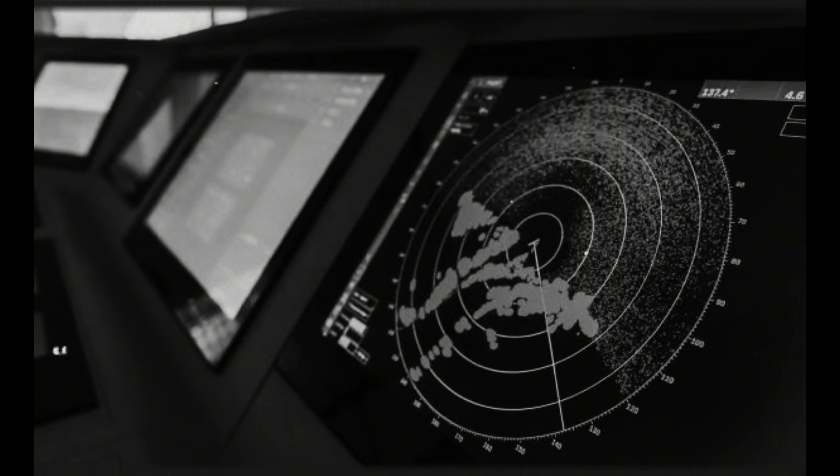The sonar trace appearing on NATO screens in the early 1970s does not look like a ship. It looks like a glitch in the laws of physics. In the cold, pressure-crushed silence of the North Atlantic, a new shadow is moving faster than anything nature or engineering should allow. It is the beginning of a technological sprint that will break records, break budgets, and eventually break the men inside the machine.

For the sonar operators of the Royal Navy and the United States Navy, the North Atlantic in 1970 is a known quantity. It is a vast gray battlefield mapped out in frequencies and decibels. They know the rhythmic thrum of a Soviet November-class submarine and the quiet, metallic whine of a Victor-class. They understand the capabilities of their adversaries because the physics of water imposes hard limits on what a submarine can do. Resistance increases exponentially with speed. To go twice as fast requires 8 times the power. Consequently, submarines are predators of patience, moving slowly to remain silent, hiding in the thermal layers of the ocean to wait for a target.

But then the reports begin to arrive, and they describe something that should not exist. A British frigate patrolling the Greenland, Iceland-United Kingdom gap detects a contact moving deep below the isothermal layer where water temperature stabilizes. This is normal. What happens next is not.

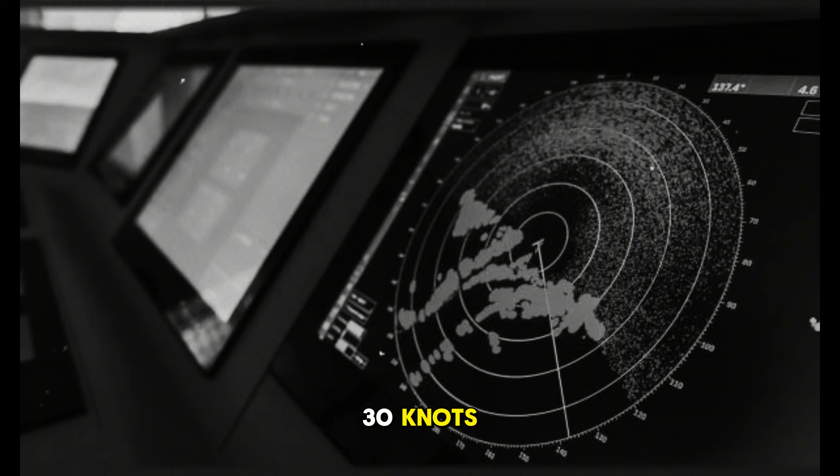The contact accelerates. It does not speed up gradually like a heavy vessel overcoming inertia. It bolts. The sonar operators watch their displays in disbelief as the target speed climbs past 30 knots, then 35, and finally breaches 40 knots. To put this in perspective, 40 knots is roughly 46 miles per hour.

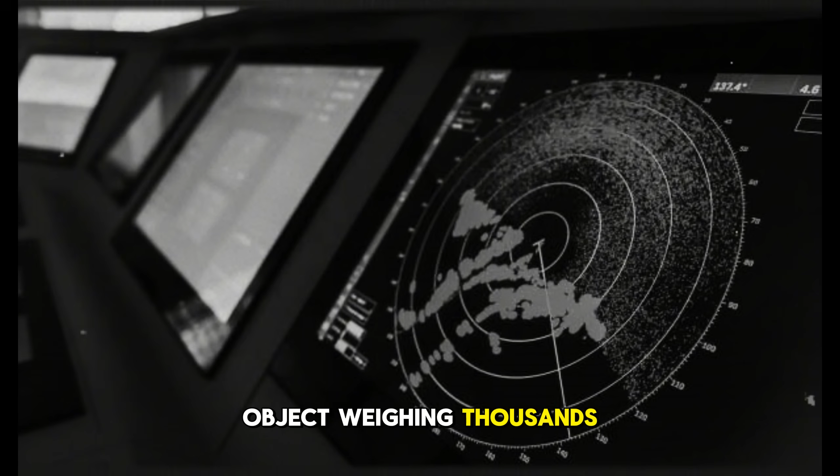In the dense medium of water, for a submerged object weighing thousands of tons, this speed is akin to breaking the sound barrier. Most NATO torpedoes of the era are designed to chase targets moving at 25 or 30 knots. This new contact is moving fast enough to outrun the weapons designed to kill it.

The initial reaction in Western intelligence circles is denial. Analysts at the Office of Naval Intelligence assume the data is flawed, perhaps a sonobuoy malfunctioned, or the operator mistook a biological anomaly, a fast-moving whale or a school of tuna, for a mechanical one. The ocean is full of strange noises, and it is easier to believe in a machine error than to believe the Soviet Union has solved a problem that Western engineers consider impossible.

But the contacts continue. They appear in the Mediterranean, in the Barents Sea, and in the deep Atlantic. The pattern is always the same. The target appears out of nowhere, executes maneuvers with a turning radius that defies hydrodynamic drag, and then accelerates to speeds that make tracking fire control solutions collapse. It behaves less like a submarine and more like a fighter jet.

By 1972, the denial has evaporated, replaced by a cold, professional dread. The West assigns a code name to this new class of vessel. They call it the Alpha.

The emergence of the Alpha-class submarine forces NATO to confront a terrifying reality. Their entire anti-submarine warfare doctrine might be obsolete. Western naval strategy relies on the concept of first look, first shot. The idea is to detect the enemy quietly, fire a homing torpedo from a distance, and sink the target before it realizes it is being hunted. But this doctrine assumes the target cannot simply outrun the bullet.

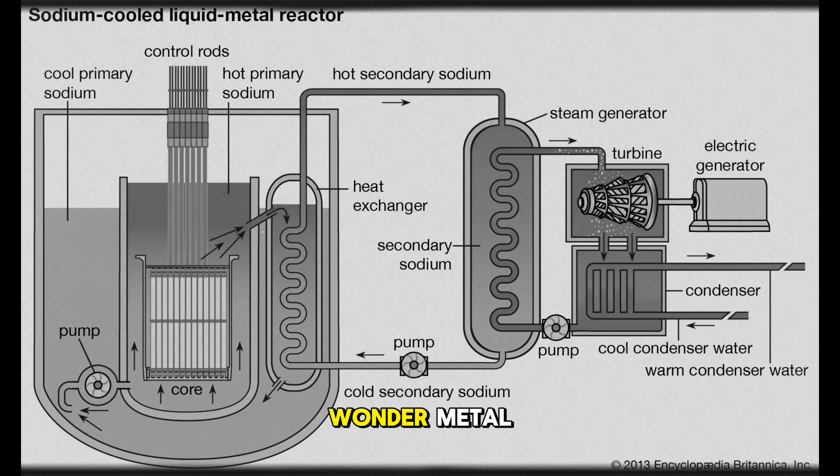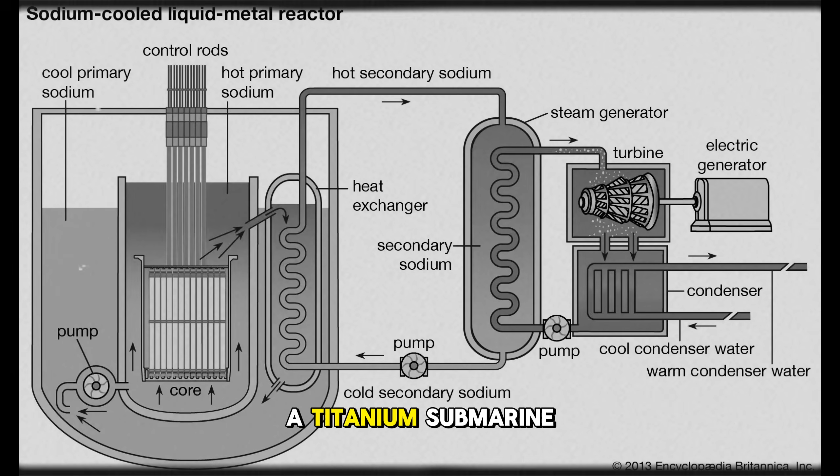Titanium is a wonder metal. It is 40% lighter than steel, but equally strong. It is paramagnetic, meaning it does not have a magnetic signature, rendering the magnetic anomaly detectors used by NATO patrol aircraft useless. A titanium submarine would be a ghost to magnetic sensors and a rocket to acoustic sensors, but choosing titanium was only half the solution.

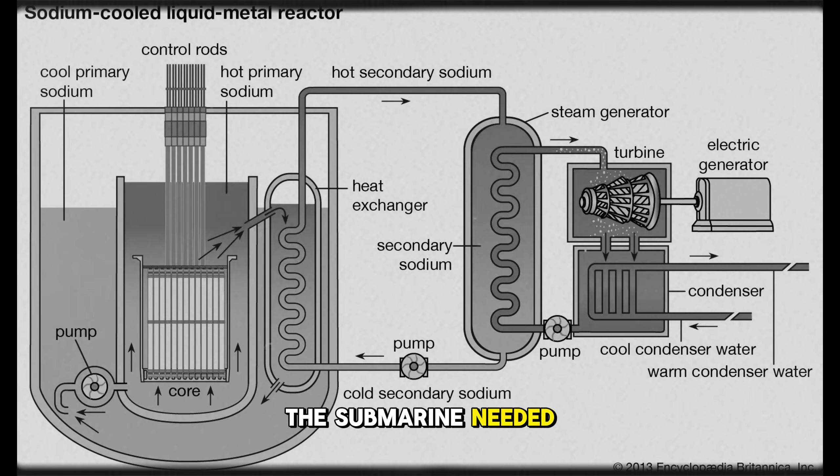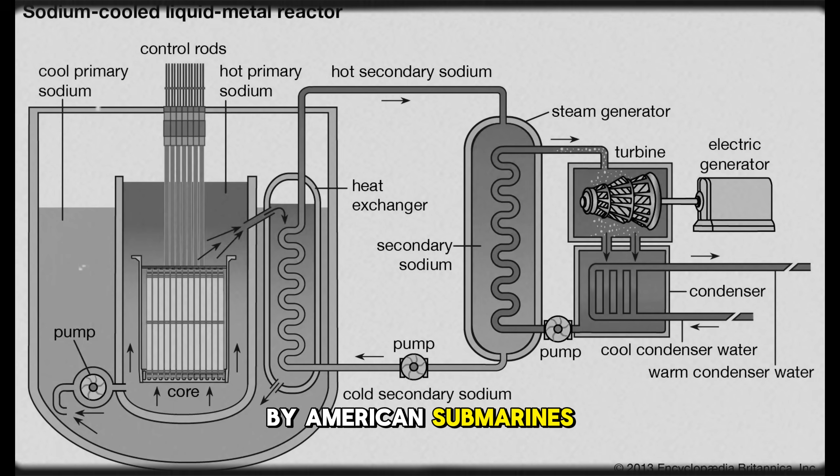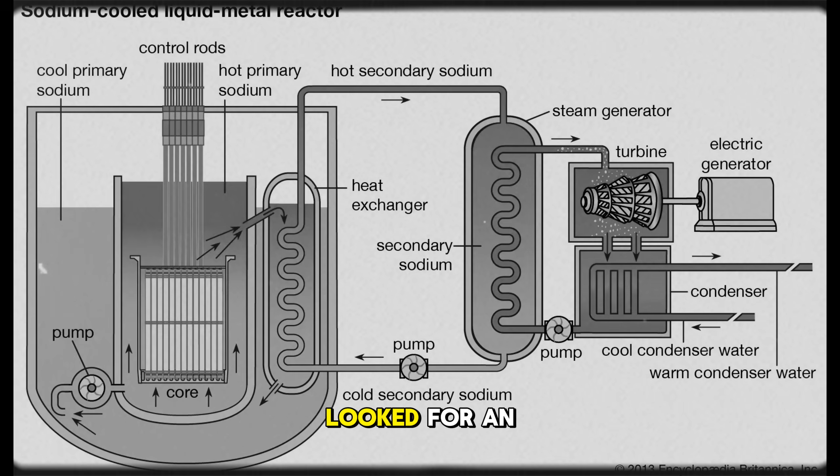To reach 40 knots, the submarine needed a propulsion system with a power-to-weight ratio that was unheard of in marine engineering. Standard pressurized water reactors, the type used by American submarines and civilian power plants, were too heavy and too bulky. They operated at relatively high pressures and required massive shielding and piping systems. The Soviet scientists looked for an alternative and found it in the periodic table's heavier elements.

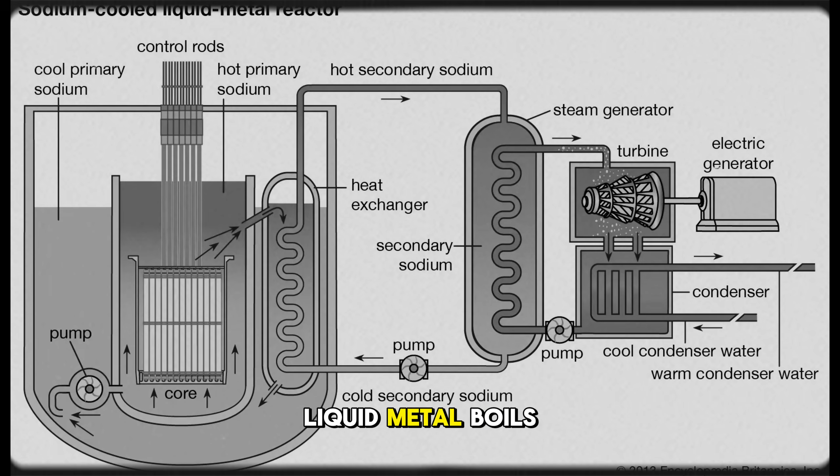They proposed a reactor cooled not by water, but by liquid metal, specifically a mixture of lead and bismuth. A liquid metal reactor is a terrifyingly efficient heat engine. Because liquid metal boils at a much higher temperature than water, the primary cooling loop does not need to be kept under extreme pressure to prevent flashing into steam. This allows the piping to be thinner and lighter.

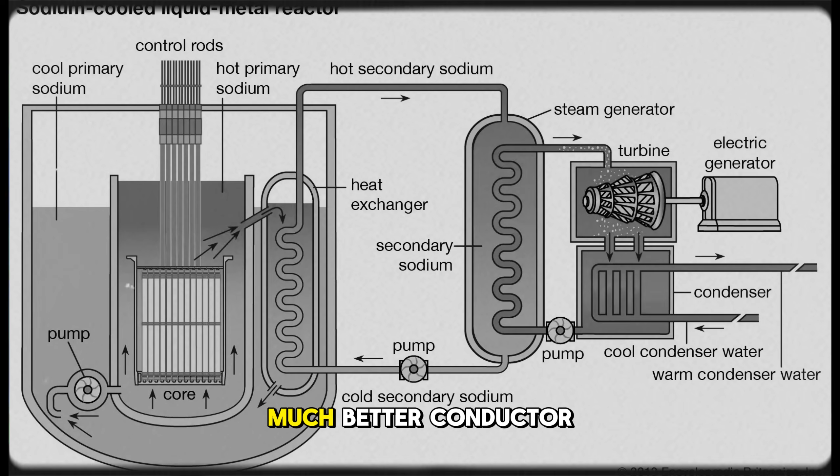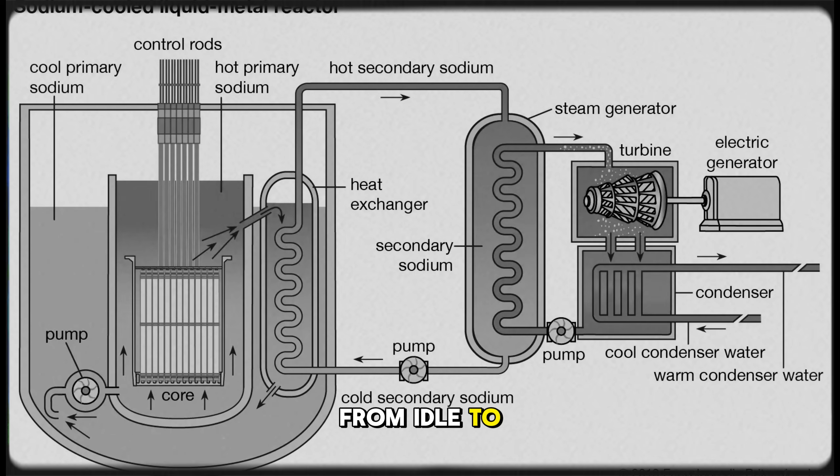Furthermore, lead bismuth is a much better conductor of heat than water. It can pull energy out of the uranium core at a rate that allows for immediate, explosive power changes. The result was a reactor that was compact, lightweight, and incredibly powerful. It could go from idle to full power in minutes, giving the Alpha the acceleration of a sports car.

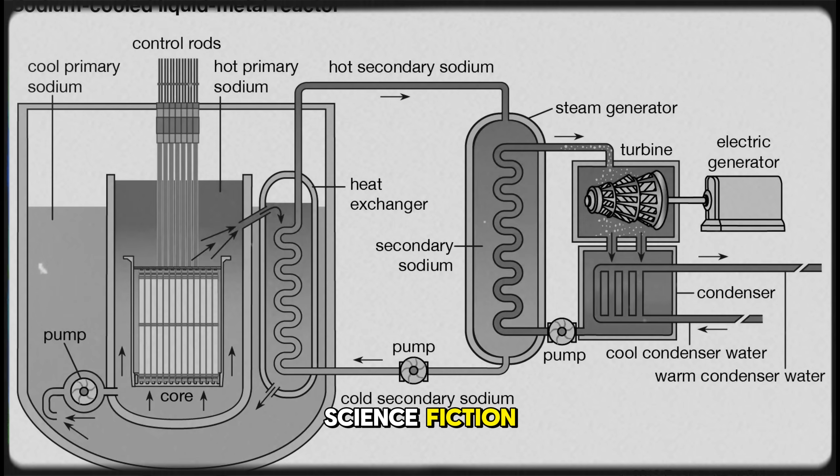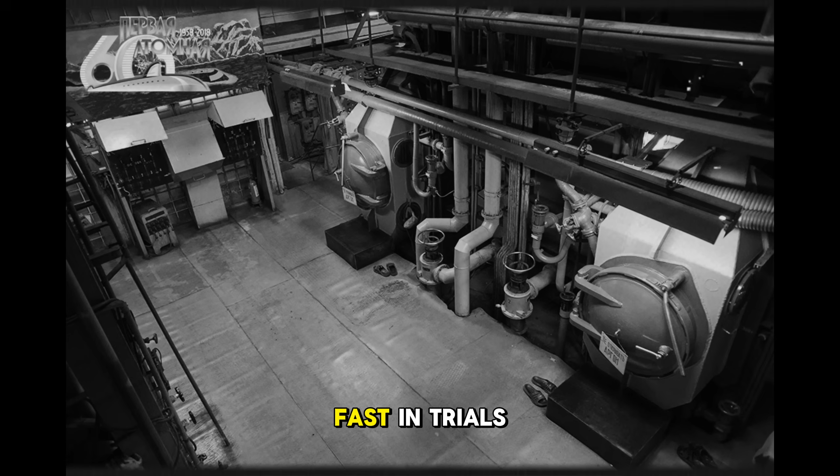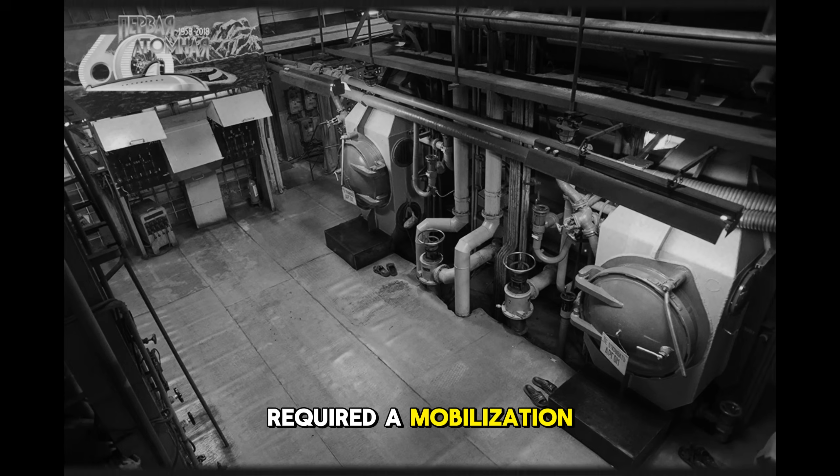When combined with the titanium hull, the specifications of the Project 705 submarine seemed to belong to science fiction. It had a displacement of only 3,000 tons, half that of a standard attack submarine. It carried a crew of roughly 30 men, relying on heavy automation to replace the dozens of sailors usually required to turn valves and watch gauges. And it was fast. In trials, it would eventually hit speeds that remain classified but are rumored to approach 45 knots.

However, the decision to pursue this design required a mobilization of Soviet industry that rivaled the space program. The Soviet Union had to build an entire infrastructure from scratch just to construct the hull. Welding titanium is not like welding steel. Titanium is highly reactive. If hot titanium comes into contact with oxygen, it absorbs the gas and becomes brittle. A weld made in the open air might look perfect, but it will shatter like glass under the pressure of the deep ocean. To solve this, the shipyards at Severodvinsk had to construct massive, hermetically sealed halls.

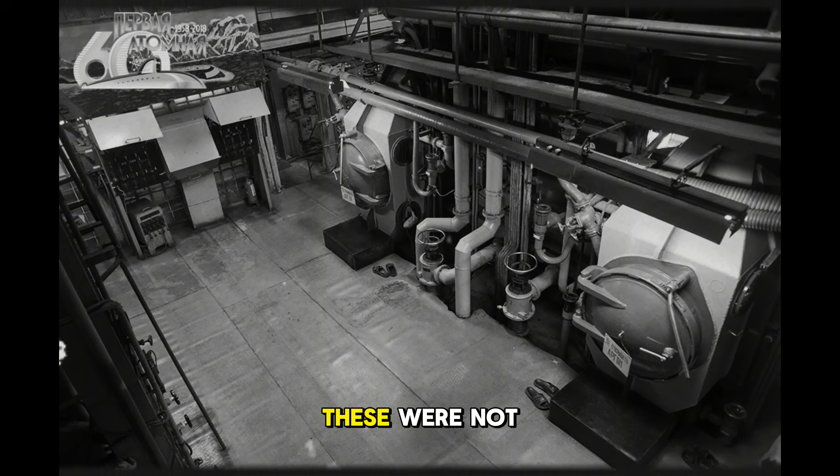These were not just clean rooms, they were atmospheric chambers filled with argon gas. Workers had to wear suits reminiscent of cosmonauts, breathing supplied air while they welded the hull sections in an oxygen-free environment. The cost was astronomical.

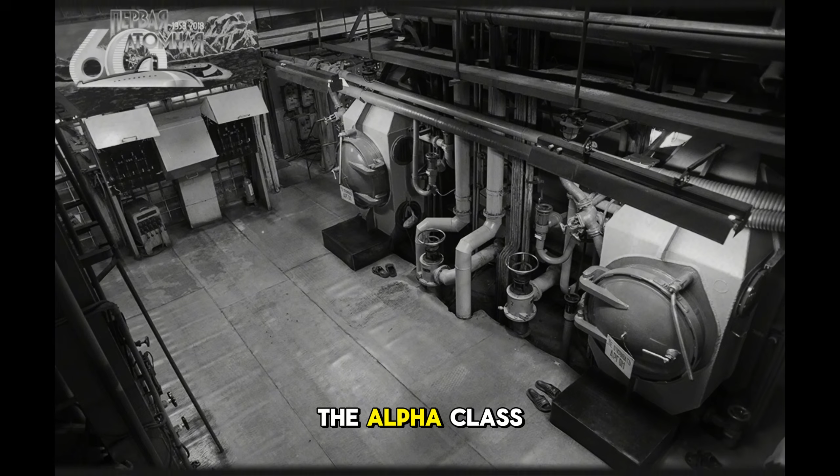The titanium alloy was expensive to mine, expensive to refine, and expensive to work. The rejection rate for parts was high. A single microscopic flaw in a weld meant that entire sections of the hull had to be scrapped. The Alpha-class submarine became the most expensive naval project in Soviet history.

Yet the Soviet leadership wrote the checks. They were driven by the fear of American carriers and the seduction of technological superiority. They believed that the Alpha was the silver bullet that would neutralize the U.S. Navy's numerical advantage. They envisioned wolf packs of these titanium interceptors sprinting out from the Kola Peninsula, immune to torpedoes, diving deep to evade sensors, and surfacing to destroy the enemy fleet.

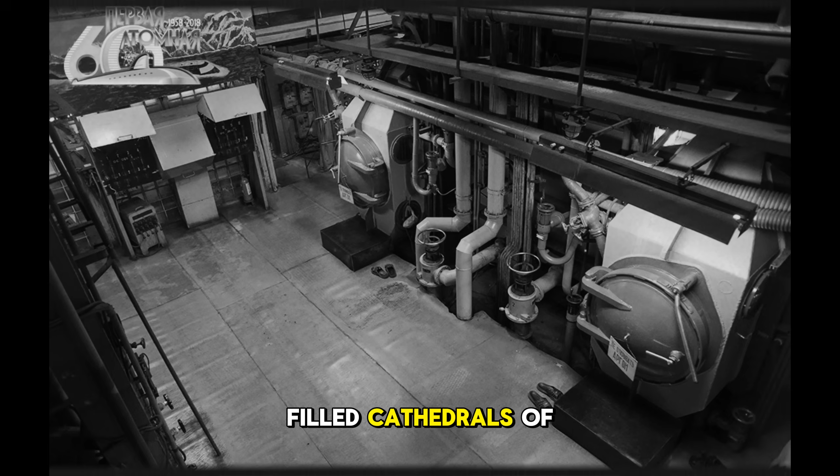As the first hulls began to take shape in the argon-filled cathedrals of Severodvinsk, the mood was one of triumph. The Soviet engineers believed they had conquered the ocean. They had used physics and chemistry to bypass the limitations of naval architecture. They had built a machine that was faster, deeper, and more advanced than anything the West could dream of.

But in their pursuit of performance, they had made a fatal miscalculation. They had focused entirely on what the submarine could do in the ideal conditions of combat, ignoring what it required to survive in the mundane reality of peace.

They had built a Formula One race car for a war that would require a long-haul truck. The Alpha was designed to be a weapon of the apocalypse, a sprinter for the final war. It was not designed to sit at a pier, not designed for the slow, grinding attrition of the Cold War patrol cycle. And most critically, it was built around a reactor that had one catastrophic flaw: it could never be turned off.

As the first Alpha-class submarine, K-64, prepared for launch, the NATO intelligence agencies were scrambling to understand the threat. They saw the speed, they saw the depth, they saw a weapon that could change the balance of power. What they did not see, what even the Soviet designers were just beginning to understand, was that the greatest threat to the Alpha was not the American Navy. It was the Alpha itself.

The contact that should not exist was real. It was out there, prowling the Barents Sea, moving with a speed that terrified the captains of British frigates and American destroyers. But inside the titanium hull, the seeds of failure were already planted. The liquid metal heart of the ship was beating, but it was a heart that demanded a price the Soviet Union would struggle to pay.

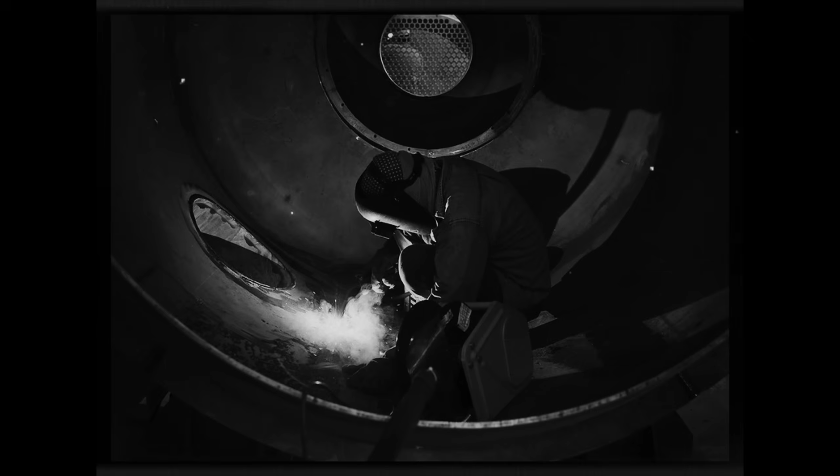The United States had experimented with titanium components and later would build a deeper diving research vessel, the Alvin, using a titanium sphere. But building a small sphere is radically different from building a 300-foot-long pressure hull that must withstand the violence of combat. The primary enemy of titanium construction is not the metal itself, but the air we breathe.

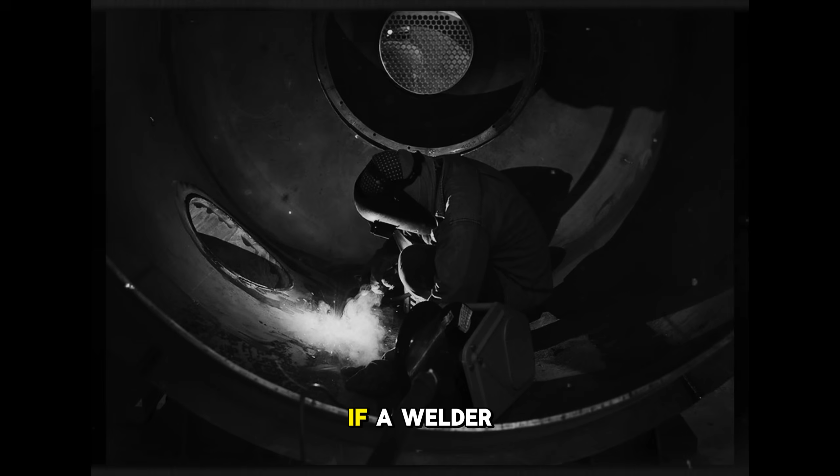At room temperature, titanium is stable. But when heated to the melting point required for welding, it becomes a chemical sponge. It avidly absorbs hydrogen, nitrogen, and most dangerously, oxygen. If a welder strikes an arc on a titanium plate in the presence of standard atmospheric air, the metal sucks in oxygen molecules. On a microscopic level, these molecules wedge themselves into the crystal lattice of the alloy.

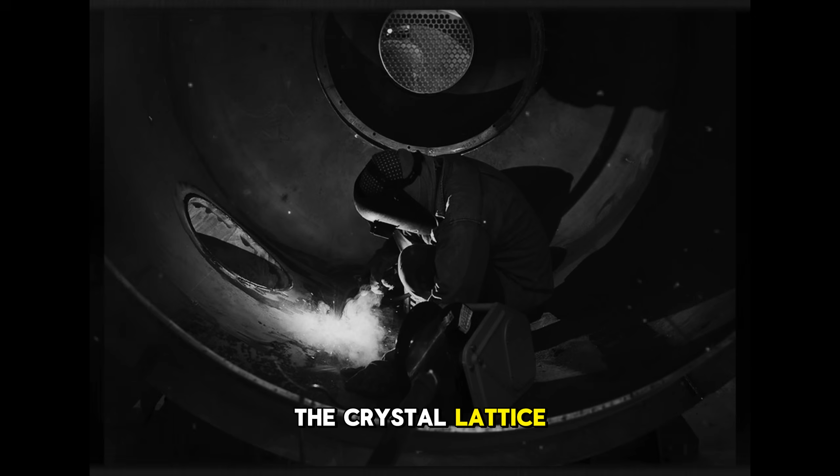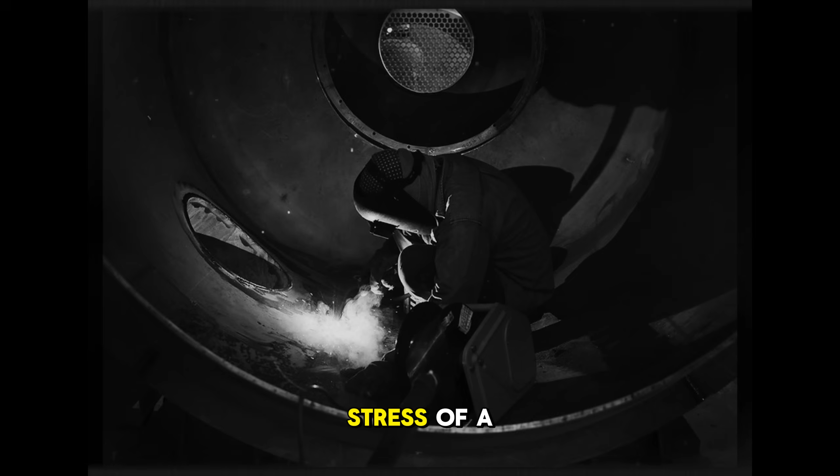As the weld cools, it does not form a flexible, strong bond. It becomes a brittle ceramic. To the naked eye, the weld looks perfect. But under the stress of a deep dive, that brittle seam will shatter like glass. A hull failure at 2,000 feet is not a leak. It is an implosion that occurs faster than the human nervous system can register pain.

To solve this, the Soviet Union had to reinvent the shipyard. At the Sevmash facility in Severodvinsk, on the edge of the White Sea, a new kind of industrial cathedral was erected. It was known simply as Shop 50. Shop 50 was not a standard dry dock.

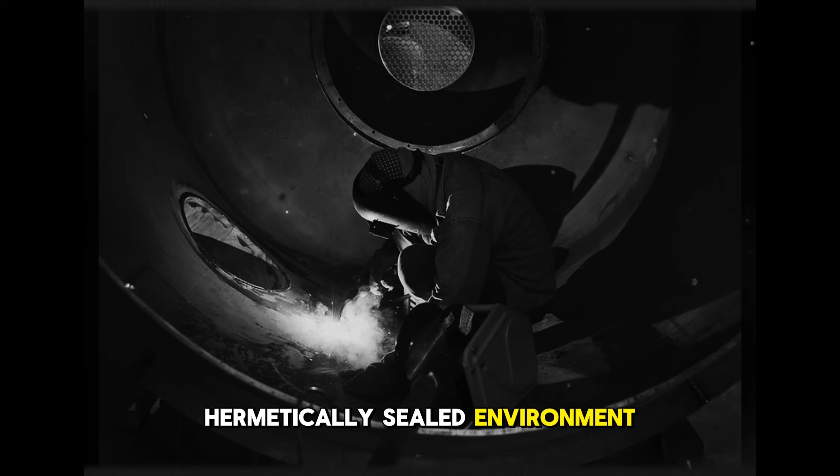It was a hermetically sealed environment, a massive clean room built on the scale of an aircraft hangar. To weld the hull sections of the Alpha, Soviet engineers could not simply use gas shielding on the torch, a common technique for smaller jobs. The risk of contamination was too high. Instead, they flooded the entire working environment with argon.

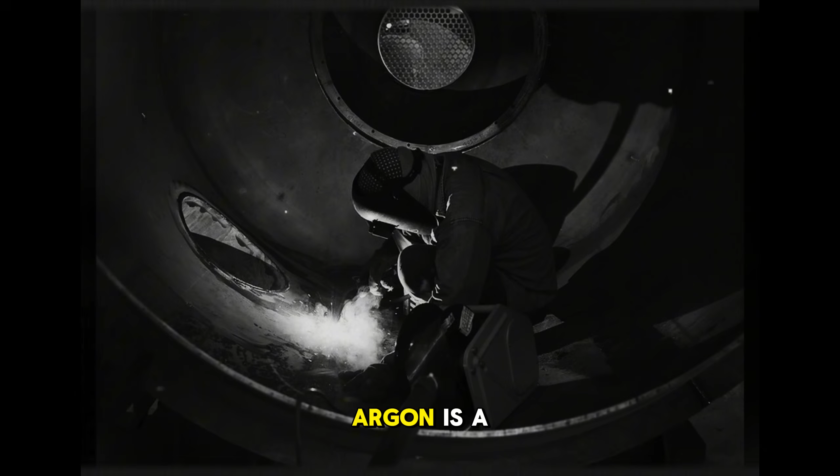Argon is a noble gas. It is inert, meaning it does not react with other elements. By displacing the air in the welding chambers with argon, the shipbuilders created an artificial atmosphere where titanium could be melted and fused without absorbing oxygen.

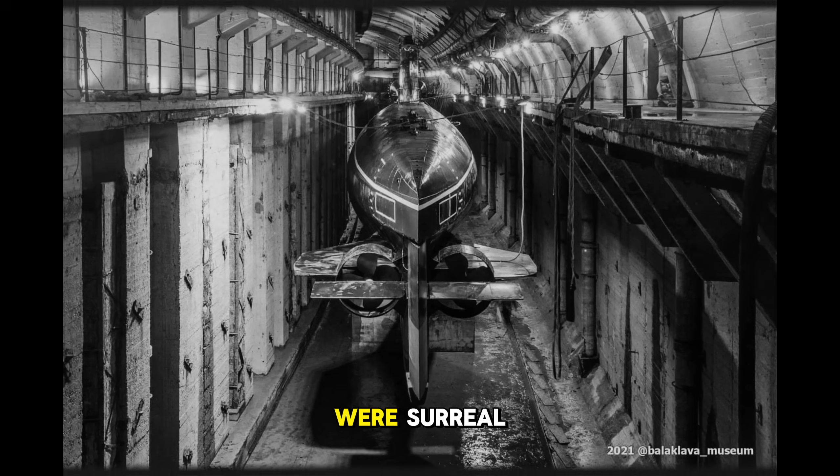The working conditions inside these chambers were surreal. Human beings cannot breathe argon. The welders, the fitters, and the inspectors had to wear heavy, rubberized suits supplied with oxygen through umbilical hoses. They looked less like shipwrights and more like cosmonauts walking on the surface of a hostile planet.

They worked in shifts, moving slowly in their bulky suits, surrounded by the eerie green-blue glow of the welding arcs. The silence in the chambers was profound, dampened by the heavy gas and the suits. Communications were handled by radio. Every movement was deliberate. A tear in a suit meant suffocation. A fluctuation in the argon purity meant scrapping a hull section worth millions of rubles.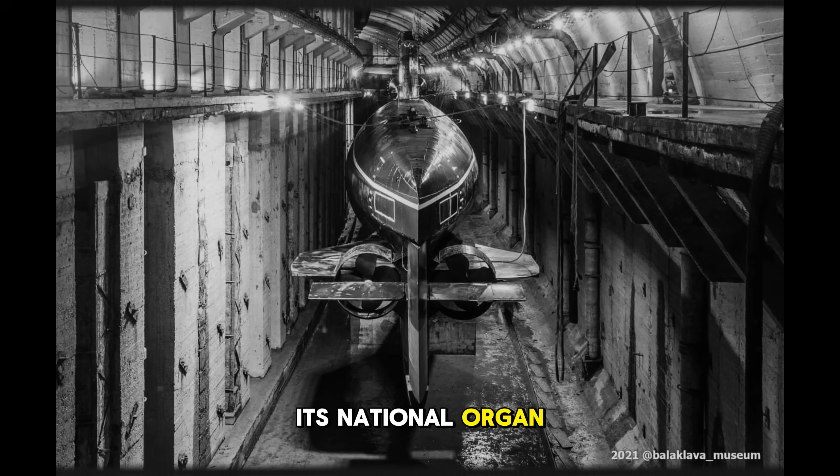The sheer scale of the logistical effort required to supply Shop 50 was staggering. The Soviet Union had to divert a significant percentage of its national argon production to Severodvinsk. The mining of the titanium ore, the refining of the sponge metal, the rolling of the thick plates, and the transport to the Arctic—it was a supply chain that spanned the entire Eurasian landmass.

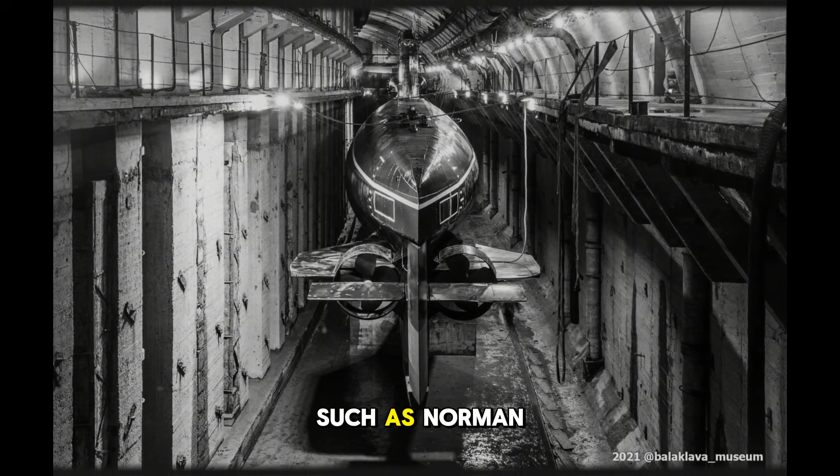Western historians and naval analysts such as Norman Polmar have noted that the construction of the Alpha class was less of a shipbuilding program and more of a national moonshot. The resources poured into these 7 submarines could have built a fleet of conventional vessels. The cost was so exorbitant that even within the Soviet Admiralty, voices of dissent began to whisper.

There is a famous, perhaps apocryphal, story involving Admiral Sergei Gorshkov, the architect of the modern Soviet Navy. It is said that during a tour of the shipyard, a cynical officer remarked that it would have been cheaper to build the submarines out of solid gold. The nickname stuck—to the sailors and the workers, the Alpha became known as the Golden Fish.

But the investment yielded a capability that terrified NATO. The titanium hull provided more than just speed and depth. It provided invisibility. One of the primary methods used by Western maritime patrol aircraft, such as the P-3 Orion, to find submarines is magnetic anomaly detection, or MAD.

The Earth is surrounded by a magnetic field. A massive object made of ferrous metal, like a steel submarine, distorts this field locally. A plane flying low over the ocean can detect this distortion, pinpointing the location of the submerged boat even if it is running silent. Titanium is paramagnetic. It does not distort the Earth's magnetic field. To a MAD sensor, the Alpha-class submarine simply did not exist.

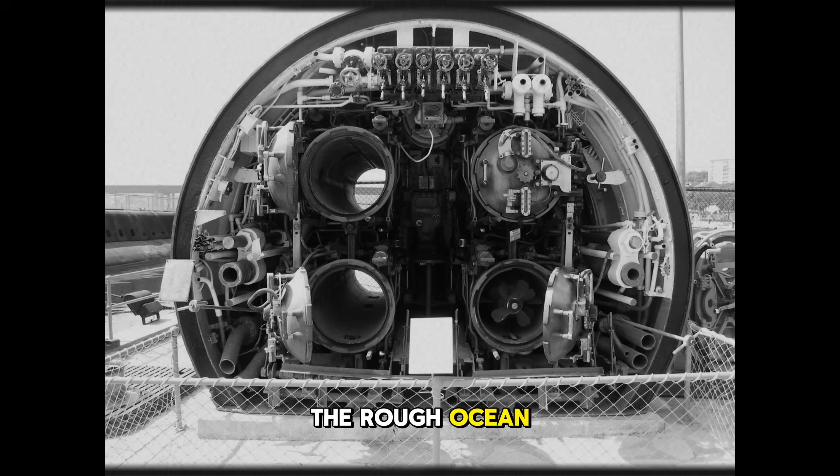However, the rigidity of the material introduced new, unexpected problems. Titanium is incredibly hard, but it is also incredibly resonant. Steel has a natural dampening quality. It absorbs some vibration. Titanium rings like a bell.

The engineers discovered that the internal machinery—the pumps, the turbines, the gears—created vibrations that traveled through the titanium hull with alarming efficiency. The hull acted as a sounding board, amplifying the internal noise and radiating it into the ocean. The golden fish was structurally perfect, but acoustically, it was a drum.

To counter this, the shipyards had to develop new isolation techniques. They suspended the internal decks on heavy rubber rafts. They coated the exterior of the hull in thick layers of anechoic rubber tiles, designed to absorb both enemy sonar pings and the submarine's own radiated noise.

It was a constant battle between the nature of the material and the needs of the mission. The construction process was slow and agonizing. The first hull, K-64, took years to complete. The rejection rate for the welds remained a constant headache.

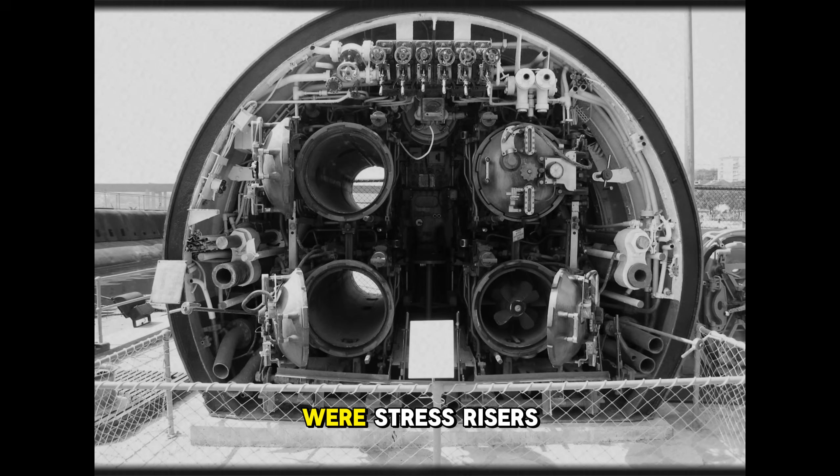Ultrasonic testing would reveal microscopic pores in the metal, tiny bubbles of gas trapped during the fusion process. These flaws, invisible to the eye, were stress risers. Under the immense pressure of the deep ocean, a crack could start at a microscopic pore and unzip the entire hull in milliseconds.

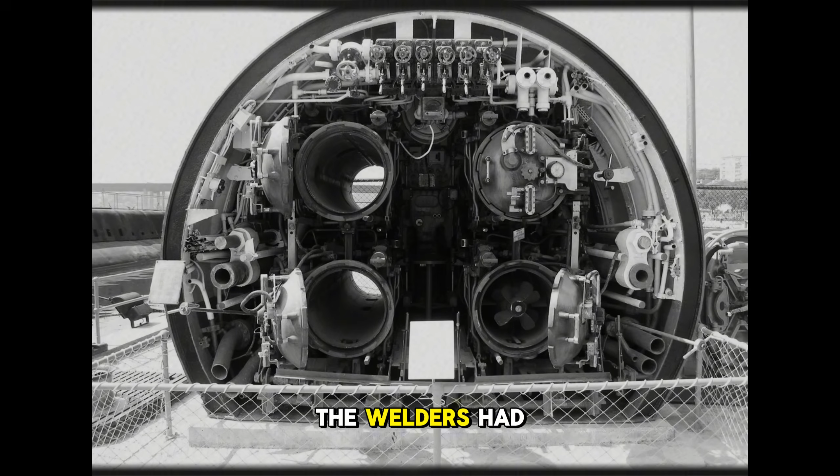When a flaw was found, the section had to be cut out. The edges had to be remachined. The argon atmosphere had to be reestablished. The welders had to suit up again. It was a process of two steps forward, one step back. But slowly, the shape of the future began to emerge from the argon fog.

The hull of the Alpha was beautiful in a purely functional way. It was a perfect teardrop, smooth and unblemished by the rivets and seams that marked older generations of submarines. It looked like something grown rather than built.

As the systems were installed, the cramped reality of the design became apparent. The titanium pressure hull was strong, but it was small. To keep the weight down and the speed up, the internal volume was sacrificed. There were no long corridors or spacious mess halls. Every cubic inch was packed with machinery.

The crew would live in spaces that resembled the interior of a spacecraft. There was no room for error, and certainly no room for comfort. The human beings who would man this vessel were almost an afterthought, biological components squeezed into the gaps between the titanium ribs.

The launch of the first Alpha was a moment of supreme triumph for the Soviet military-industrial complex. They had done the impossible. They had tamed the most difficult metal on Earth. They had built a ship that could go deeper and faster than anything the Americans possessed.

But a hull, no matter how strong, is just a container. It is a shell waiting for a soul. To make the Alpha truly dangerous, to make it the sprinter that doctrine demanded, it needed an engine that matched the ambition of its skin.

The titanium forge had done its work. Now, the baton was passed to the nuclear physicists. They had to design a reactor that could fit inside this small, precious jewel box and generate enough power to drive it at 40 knots. And like the metallurgists before them, they would choose a path that was brilliant, revolutionary, and ultimately fatal.

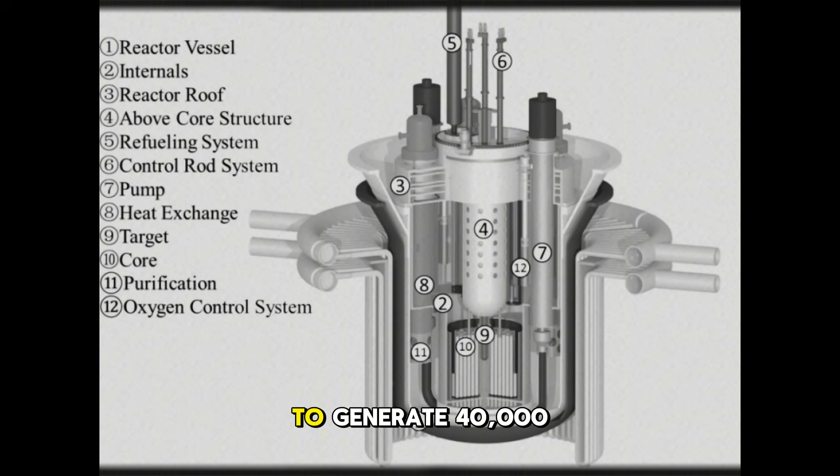The Soviet engineers needed something hotter. They needed a propulsion system that could go from a dormant whisper to a screaming roar in minutes. They needed a reactor that was small enough to fit inside the cramped titanium pressure hull, but powerful enough to generate 40,000 horsepower. They found their answer in a technology that the West had abandoned as too dangerous: the liquid metal-cooled reactor.

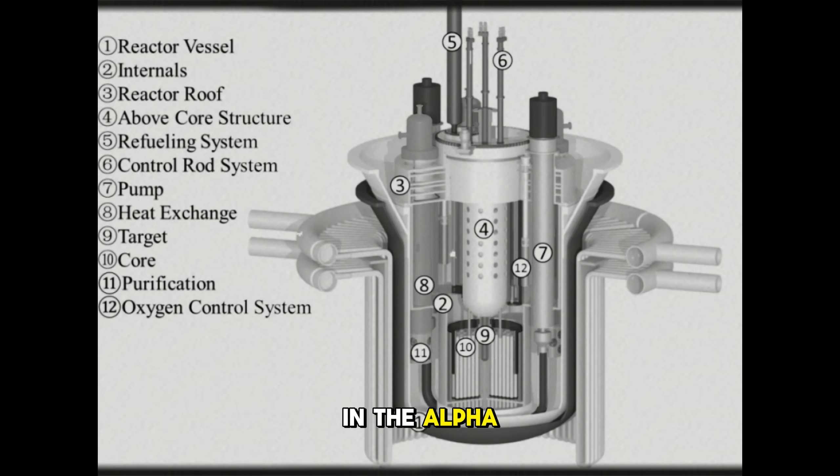The reactor installed in the Alpha, designated the OK-550 and later the BM-40A, did not use water to cool its uranium core. Instead, it used a eutectic alloy of lead and bismuth. This mixture is a heavy, silvery substance that looks like mercury but behaves very differently.

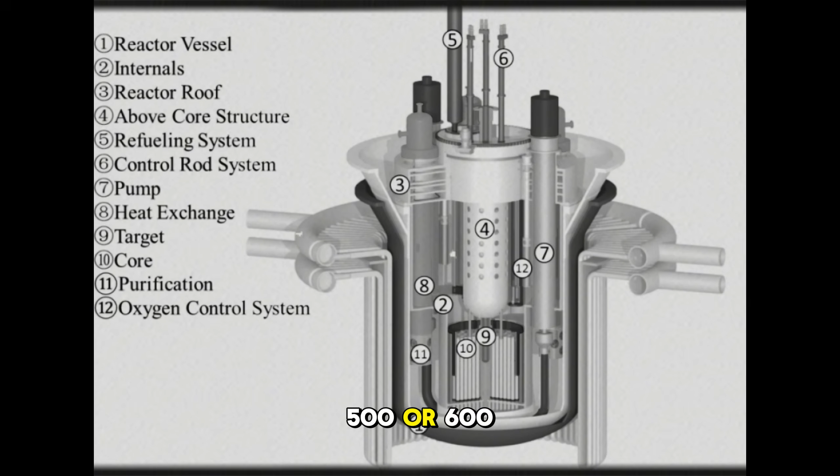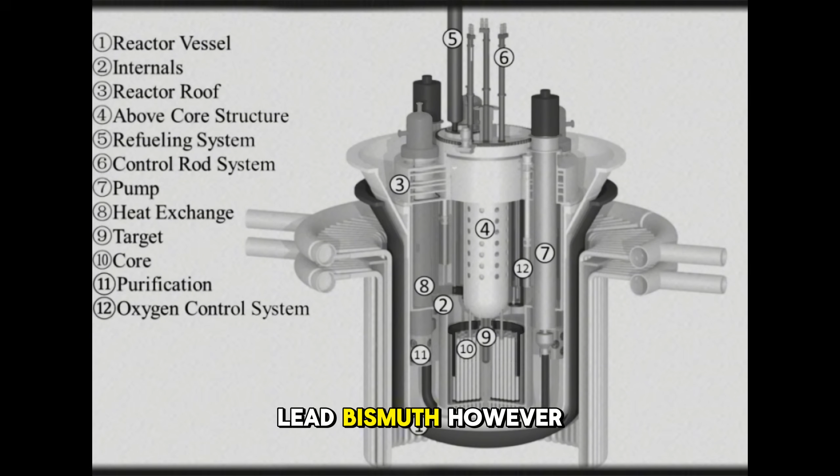The physics of this choice were seductive. Water boils at 212 degrees Fahrenheit at sea level. To keep water liquid at the temperatures required for a reactor, 500 or 600 degrees, it must be kept under immense pressure, roughly 2,000 pounds per square inch. This requires thick steel piping, massive pumps, and a heavy pressure vessel. Lead-bismuth, however, does not boil until it reaches 3,000 degrees Fahrenheit. This meant the primary cooling loop of the Alpha did not need to be highly pressurized.

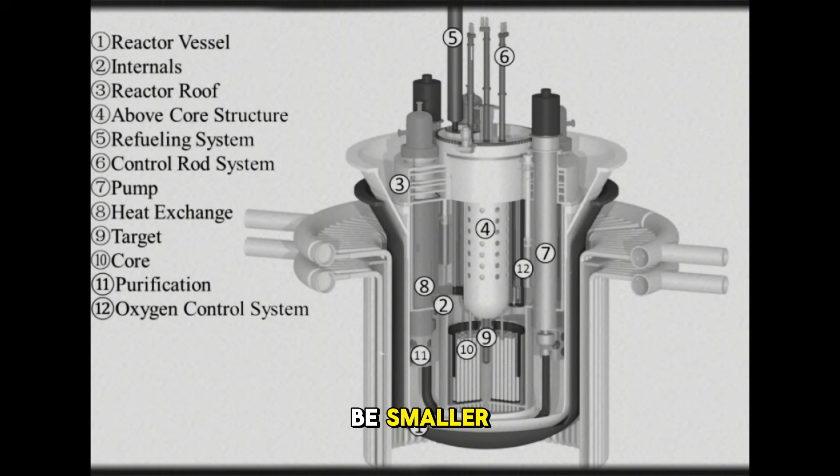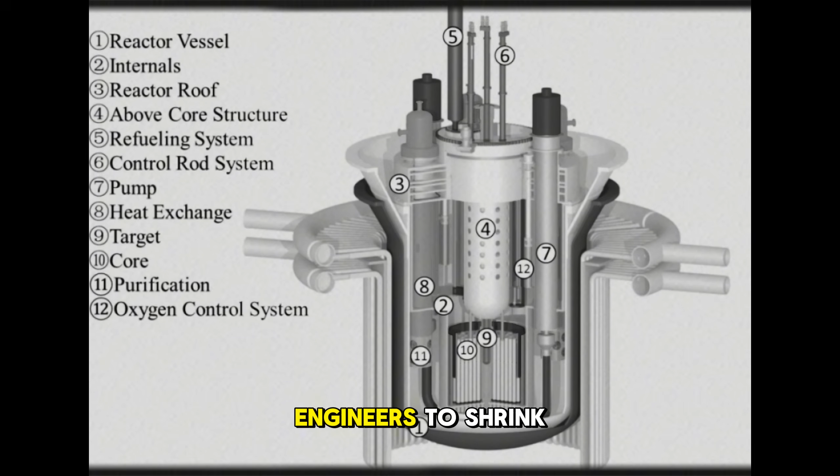The pipes could be thinner, the pumps could be smaller, the reactor vessel itself could be lighter. Furthermore, liquid metal is a voracious conductor of heat. It can pull thermal energy out of the fuel rods far faster than water. This allowed the engineers to shrink the reactor core to a fraction of the size of a standard unit. They packed highly enriched uranium into a space barely larger than an oil drum. The result was a power plant with the highest power-to-weight ratio in the history of marine engineering. It was a nuclear Ferrari engine dropped into a go-kart.

When the control rods were withdrawn, the temperature of the liquid metal skyrocketed instantly. The heat transfer to the steam generators was immediate. The turbines spun up with a speed that shocked the helm crews, and Alpha could accelerate from a standstill to 40 knots in a matter of minutes, a feat that a standard American submarine would take much longer to achieve. But this incredible performance came with a thermodynamic price tag that would ultimately doom the fleet.

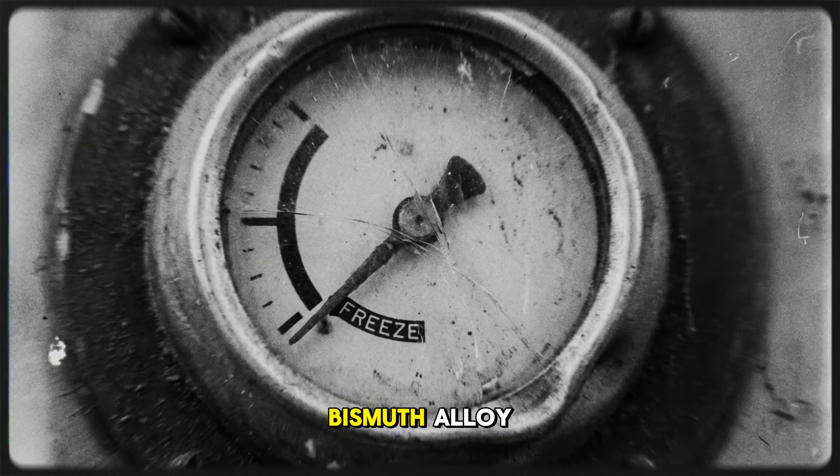Water has a unique safety feature. It stays liquid at room temperature. If a standard reactor shuts down and cools off, the water just sits there. It is benign. Lead-bismuth is different. It is a metal. At room temperature, it is a solid block as hard as a rock. The melting point of the lead-bismuth alloy used in the Alpha was 257 degrees Fahrenheit.

This single number, 257 degrees, became the defining obsession of the entire program. It was the line of death for the reactor. If the temperature of the coolant ever dropped below 257 degrees, the liquid metal would begin to crystallize. It would freeze, but it wouldn't freeze like an ice cube in a tray. It would freeze inside the complex labyrinth of pipes, pumps, and heat exchangers. Once the coolant solidified, the reactor was dead.

The fuel rods would be locked in a tomb of solid metal. The control rods would be frozen in place. The pumps would seize. There was no way to simply thaw a frozen reactor inside a submarine. The metal expanded as it cooled and contracted, cracking the delicate internal plumbing. A freeze-up was a catastrophic terminal event.

This created a terrifying operational requirement. The reactor could never be turned off. For a standard submarine, returning to port means shutting down the plant. The crew goes home, the reactor goes cold, and the ship rests. For an Alpha, returning to port was the beginning of a high-stakes maintenance vigil. The reactor had to be kept hot, 24 hours a day, 7 days a week, forever. Even when the submarine was docked, the liquid metal had to be kept circulating above 257 degrees.

This required a constant source of heat. Ideally, the reactor would be run at a low power setting, using its own nuclear fission to keep the metal liquid. But running a nuclear reactor at the pier requires a full watch crew, constant monitoring, and creates safety risks for the naval base. The alternative was to hook the submarine up to a land-based supply of superheated steam. The base would pump steam from a boiler plant on the pier into the submarine's heat exchangers, keeping the liquid metal warm from the outside.

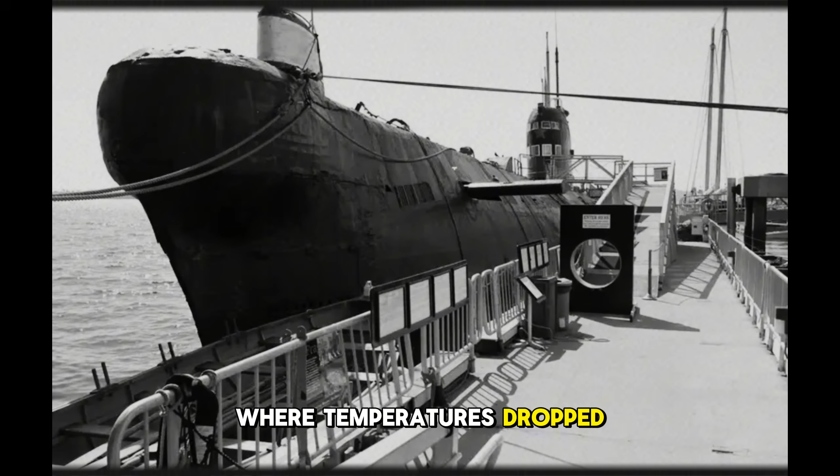This system worked in theory. In practice, it was a nightmare. The naval bases in the Soviet Arctic, Gremikha and Zapadnaya Litsa, were bleak, remote outposts. The infrastructure was crumbling. The steam lines running from the shore boilers to the piers were poorly insulated and prone to leaks. In the brutal winters of the Kola Peninsula, where temperatures dropped to 40 degrees below zero, the steam lines often froze or failed. If the shore steam failed, the submarine crew had minutes to react. They had to scramble to start the reactor and bring it up to power before the coolant temperature dropped to the critical freezing point. It was a constant game of Russian roulette with thermodynamics.

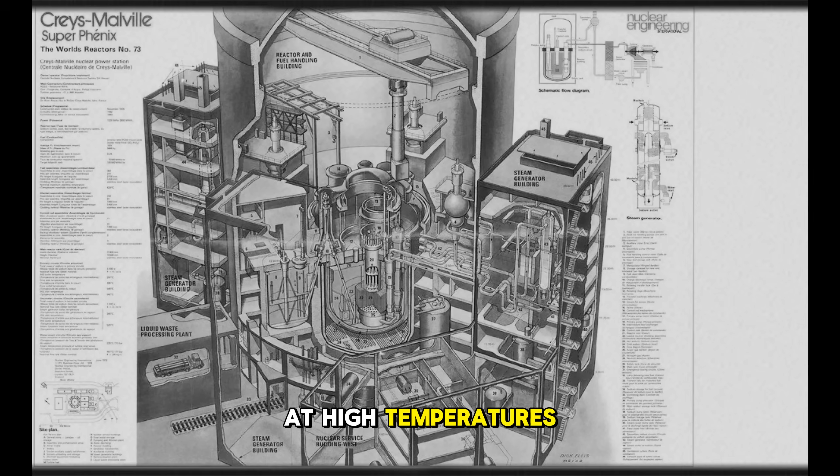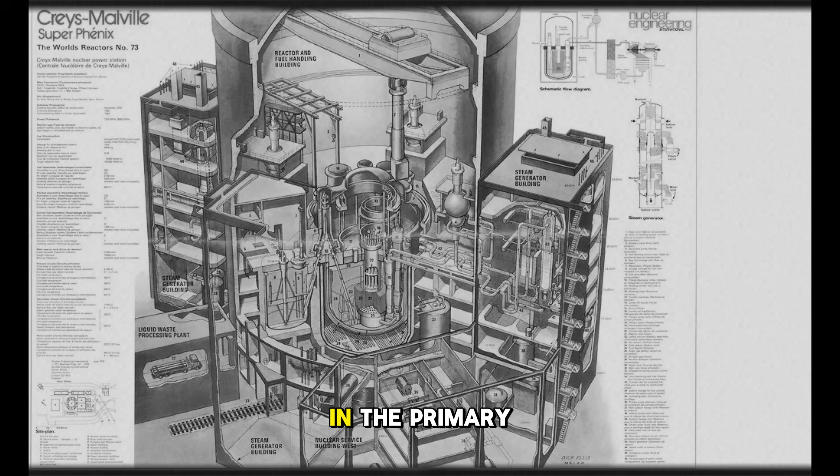The liquid metal itself was also a hazard. While it didn't boil, it was highly corrosive at high temperatures. It ate away at the steel piping and the pump impellers. Worse, when lead-bismuth is bombarded by neutrons in the reactor core, it transmutes. The bismuth turns into polonium-210. Polonium-210 is one of the most toxic radioactive substances known to man. It is an alpha emitter, deadly if inhaled or ingested. A microscopic leak in the primary cooling loop would release polonium aerosols into the reactor compartment.

The Soviet engineers tried to mitigate this. They sealed the reactor compartment and kept it at a lower pressure than the rest of the ship, ensuring that any leaks would stay contained, but leaks happened. The liquid metal, heavy and hot, would find the smallest crack in a weld. When it hit the air, it would oxidize and form a radioactive dust.

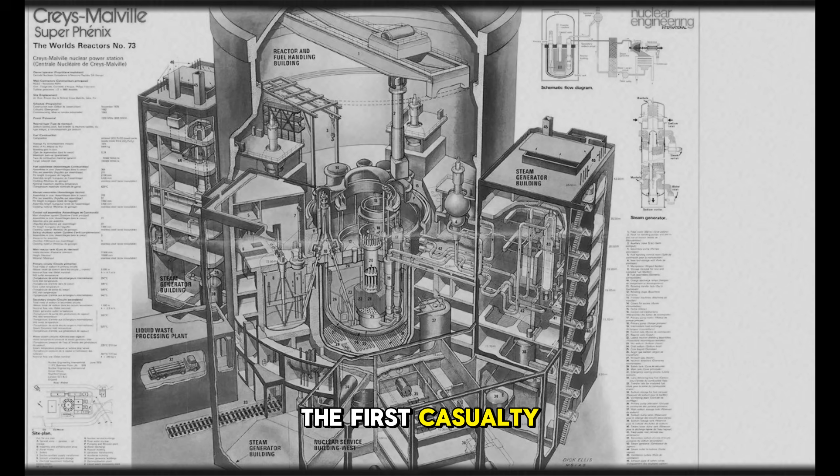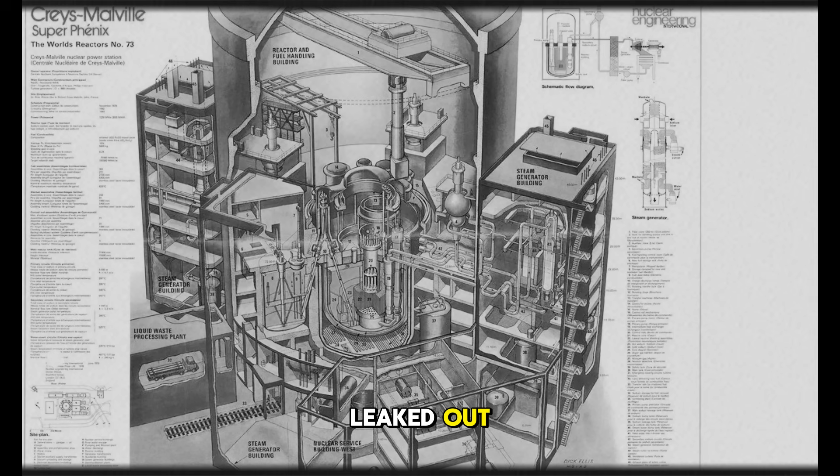The first casualty of this technology was the lead ship of the class, K-64. Launched in 1971, K-64 was the pride of the fleet. But in 1972, while the submarine was at sea, a crack developed in the primary cooling loop. The liquid metal leaked out. As the level of coolant dropped, the flow stopped. In a standard reactor, a loss of coolant is a disaster because the core overheats, a meltdown. On the Alpha, the disaster was the opposite.

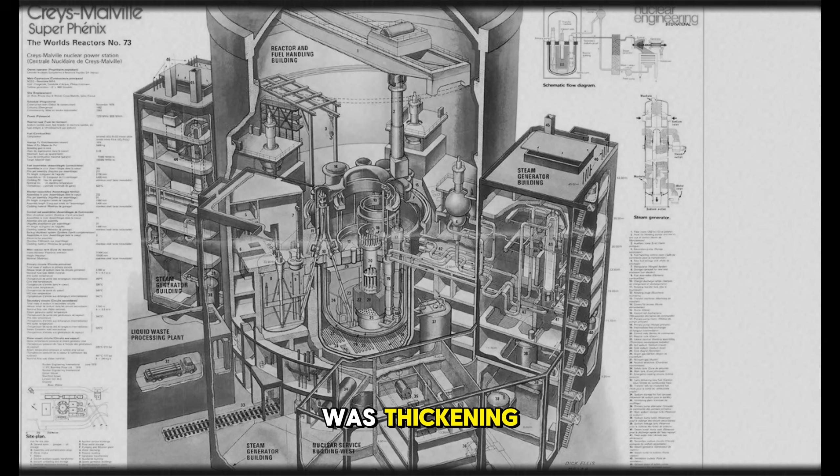The coolant that remained in the loop stopped moving. It began to cool. The crew watched the temperature gauges plummet. They tried to restart the pumps, but the metal was thickening. It turned to slush, then to stone. The reactor froze solid. The K-64 was towed back to the shipyard.

The engineers looked at the problem and realized there was no solution. The entire reactor compartment, the heart of the ship, was a solid block of radioactive lead and uranium. To fix it, they would have to cut the submarine in half. They did exactly that. K-64 was taken to the Zvezdochka shipyard.

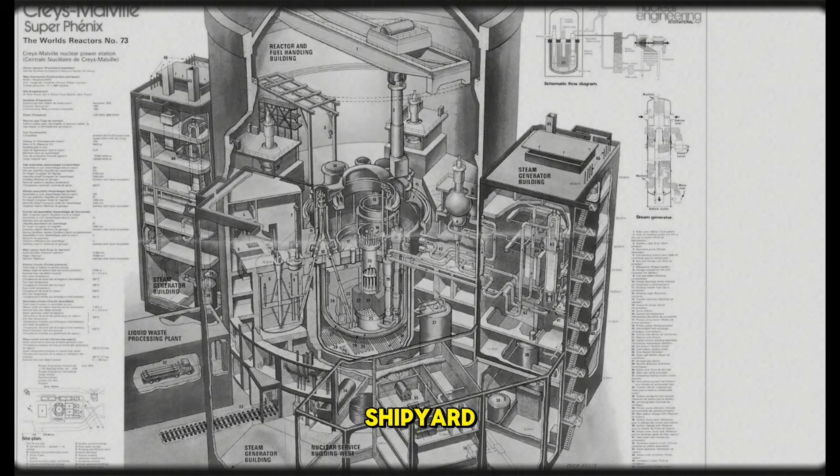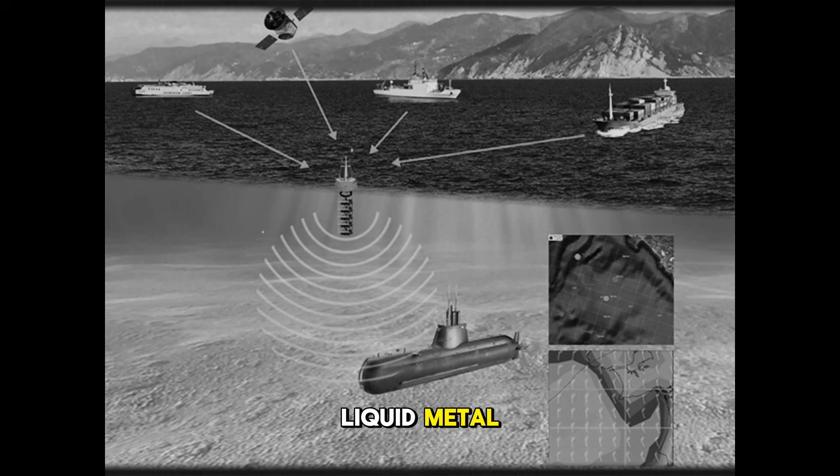The titanium hull was sliced open. The frozen reactor compartment was removed and dumped into storage. The ship was split in two, a broken monument to the unforgiving nature of liquid metal. K-64 never sailed again. It was used for training and then scrapped.

This failure should have ended the program. But the Soviet leadership was committed. They believed the issue was manageable with better training and infrastructure. They built 6 more Alphas.

The operational life of these ships became a struggle against the freezing point. The crews lived in fear of a scram, an emergency shutdown of the reactor at sea. If the reactor shut down and could not be restarted immediately, the clock started ticking. They had perhaps an hour or two of residual heat before the metal solidified and the ship became a tomb.

The liquid metal technology also introduced a strange acoustic problem. The coolant had to be pumped through the core at immense speeds to carry away the heat. The Alpha used massive electromagnetic pumps, which had no moving parts, but also mechanical centrifugal pumps for higher power levels. The flow of the heavy liquid metal through the pipes created a specific resonant noise. It was a low-frequency rumble distinct from the flow of water, and because the metal was so dense, it transmitted vibration from the machinery directly to the titanium hull with punishing efficiency.

The molten heart gave the Alpha its speed, but it also stripped away its stealth. When the captain ordered flank speed and the control rods came out, and the liquid metal surged through the veins of the ship, the Alpha became the loudest thing in the ocean. It screamed. American sonar operators described the sound of an Alpha at high speed as a freight train or a jackhammer. The turbulence of the water rushing over the titanium hull at 40 knots was deafening.

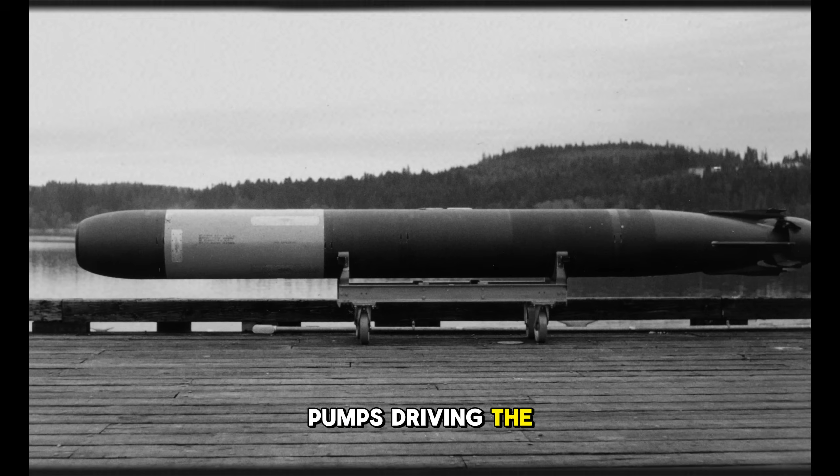The reactor coolant pumps, driving the heavy lead-bismuth mixture, hummed with a low-frequency vibration that resonated through the titanium hull. The Alpha didn't just break the silence, it shattered it. To the sonar operators of the NATO surveillance network, an accelerating Alpha was not a subtle contact, it was a blinding flare. The SOSUS arrays, the chain of hydrophones on the floor of the Atlantic, could detect an Alpha sprinting in the Barents Sea from hundreds of miles away. It lit up the acoustic spectrum.

This created a tactical nightmare for the Soviet captains. They had a ship that could outrun anything, but it could hide from nothing. As soon as they used their speed, they gave away their position to every enemy unit in the hemisphere.

Western tactics shifted to exploit this. They knew they couldn't catch the Alpha in a stern chase, so they stopped trying to chase it. Instead, they used the Alpha's own noise to vector in aircraft. P-3 Orions and Nimrod maritime patrol planes would drop patterns of sonobuoys ahead of the screaming submarine. They didn't need to be precise. The Alpha was broadcasting its future position with every second of travel.

The Americans realized they didn't need a faster submarine to kill an Alpha, they just needed a smarter torpedo. They upgraded the Mark 48 ADCAP, Advanced Capability, specifically to deal with the threat, giving it higher speeds and smarter logic. But even before the new weapons arrived, the Alpha's noise was its undoing. A submarine that is detected is a submarine that is targeted. In a war, the Alpha might survive the first torpedo by outrunning it, but it would have revealed itself to the entire enemy fleet. It would be hunted to exhaustion.

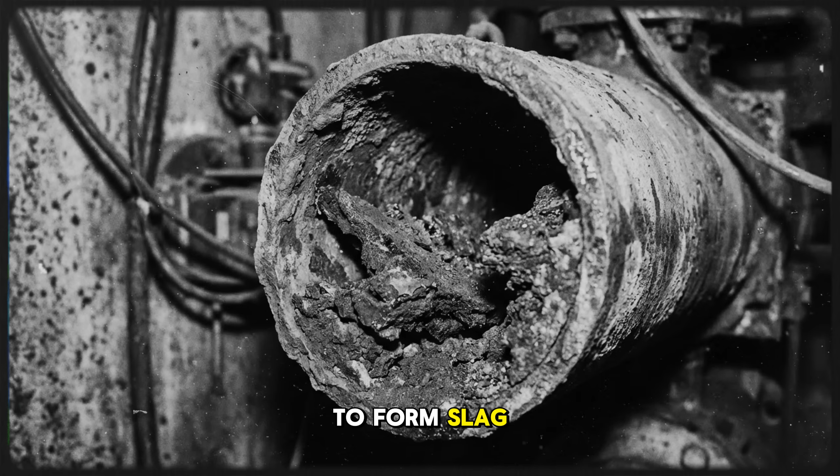The primary enemy was the reactor coolant. The lead-bismuth eutectic mixture was brilliant physics, but it was terrible chemistry. Over time, as the hot metal circulated through the loop, it reacted with trace amounts of oxygen and the steel of the piping. This created oxides, microscopic impurities that clumped together to form slag. This slag was the cholesterol of the ship's heart. It accumulated in the narrow channels of the reactor core and the steam generators. As the flow restricted, the efficiency dropped.

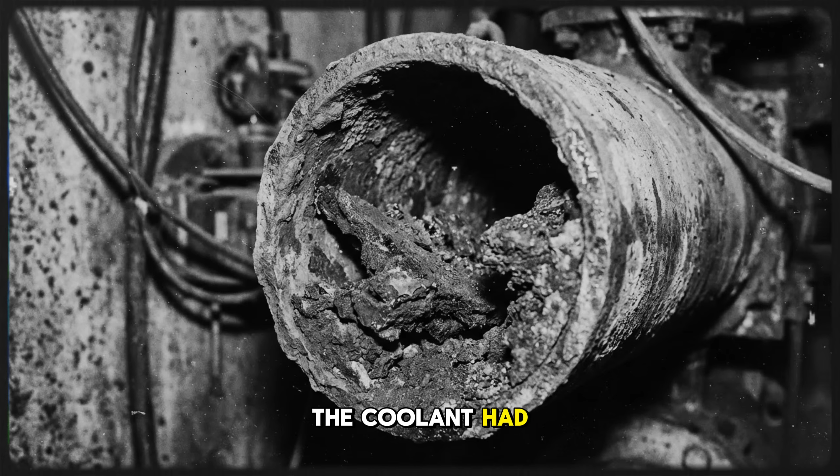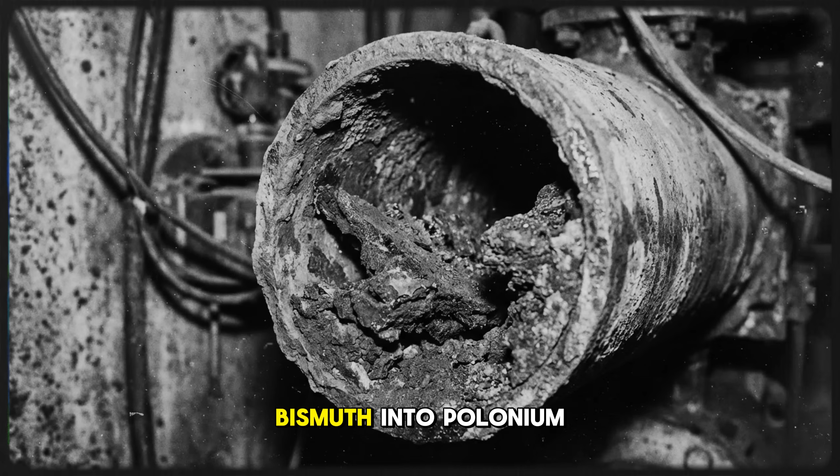To keep the reactor running, the coolant had to be constantly filtered and purified. This required specialized equipment and chemical plants that simply did not exist at a standard naval base. Furthermore, the liquid metal was highly radioactive. The transmutation of bismuth into polonium-210 meant that every pipe, every pump, and every valve in the primary loop was a radiological hazard. A mechanic could not simply unbolt a flange to fix a leak. The entire compartment had to be treated as a hot zone. Maintenance that would take a day on a water-cooled submarine took weeks on an Alpha.

The crews found themselves trapped in a cycle of preservation. Because the reactors could not be shut down without freezing solid, the submarines that were not on patrol had to be kept on life support. They were tied to the piers at Gremikha, their reactors idling at low power or kept warm by superheated steam pumped from shore. This reliance on shore steam became the Achilles heel of the fleet.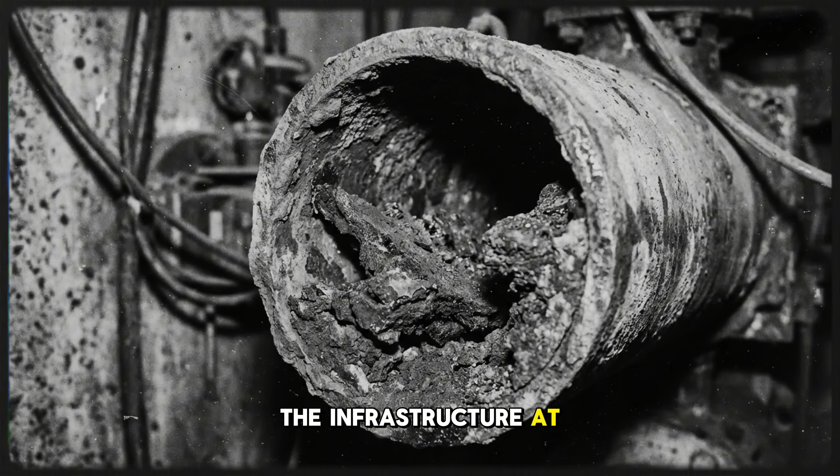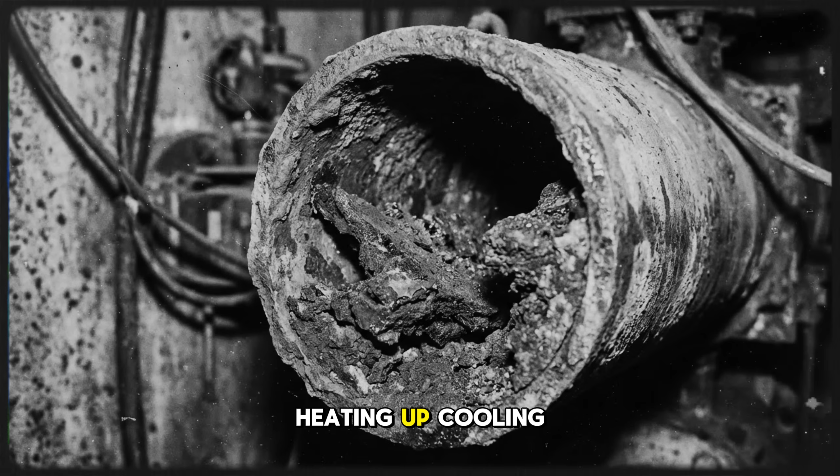The infrastructure at Gremikha was rotting. The steam pipes running along the piers were poorly insulated and frequently burst in the -40-degree winters. When the steam failed, the submarine crews were forced to scramble to bring their own reactors up to power to prevent the coolant from solidifying. This constant thermal cycling, heating up, cooling down, switching power sources, wreaked havoc on the titanium hulls and the delicate machinery.

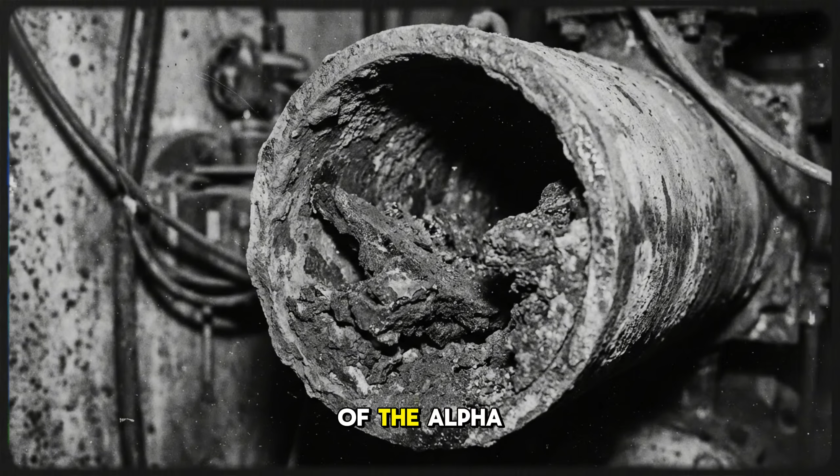The golden fish were being worn out not by the enemy, but by the weather and the poverty of their own base. The operational availability of the Alpha fleet plummeted. Of the 7 ships built, rarely were more than 1 or 2 seaworthy at any given time. The rest sat at the pier, rusting above the waterline, their crews serving as glorified boiler watchmen. They were guarding a fire that could never be allowed to go out.

Inside a ship that wasn't going anywhere. Meanwhile, on the other side of the Iron Curtain, the United States Navy and its NATO allies were watching the Alpha saga with a mixture of alarm and analysis.

The initial panic caused by the appearance of a 40-knot submarine had subsided, replaced by a cold, hard look at the strategic implications. The U.S. Navy faced a decision point. They could try to match the Alpha, launch a crash program to build their own titanium submarines with liquid metal reactors, and chase the speed demon.

There were factions within the Pentagon that argued for exactly this. Concepts were drawn up for American fast attack submarines that could hit 40 knots. But the cooler heads prevailed.

The American admirals realized that the Alpha, for all its brilliance, was a strategic dead end. They recognized the trade-off that the Soviets had made: speed for silence. The Alpha was fast, but it was loud. In the acoustic war of the 1980s, noise was death.

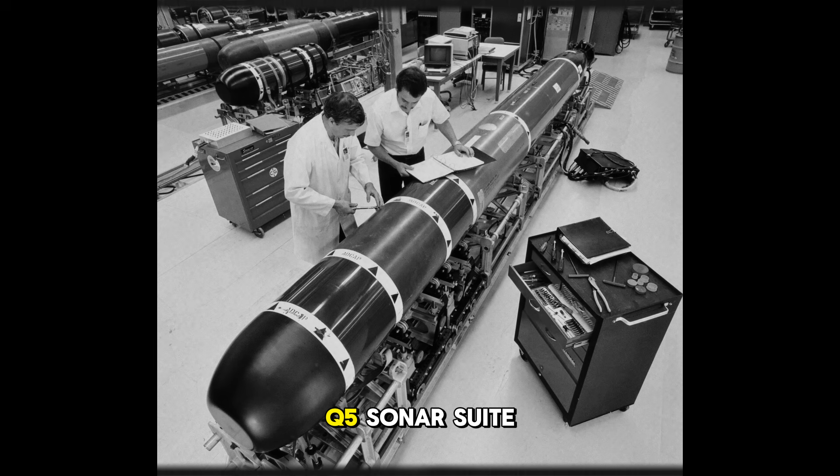A submarine that announced its position was a submarine that would be destroyed before it could launch its weapons. Instead of trying to outrun the Alpha, the West decided to outsmart it. The U.S. Navy doubled down on sensor technology. They developed the AN/BQQ-5 sonar suite and massive towed arrays, strings of hydrophones miles long that could detect the noisy Alphas from oceanic distances. If you can see the enemy 300 miles away, it doesn't matter if he is faster than you.

You can vector an aircraft to drop torpedoes right on top of him. Crucially, the West upgraded its kill mechanisms. The Mark 48 torpedo was redesigned. The new ADCAP advanced capability variant was given a larger fuel tank and a smarter guidance system. It could reach speeds of 55 knots or more, dive as deep as the Alpha, and had the logic to anticipate the submarine's evasive maneuvers.

The British Royal Navy developed the Spearfish torpedo, a weapon powered by a gas turbine engine that could sprint at 80 knots. Against a weapon like that, even 45 knots was standing still. NATO realized that they didn't need to build a better submarine, they just needed to build a better bullet. By focusing on stealth and sensors, the Los Angeles-class submarines could track an Alpha without ever being detected. The Soviet sprinter would be running a race against an invisible sniper.

This strategic pivot by the West rendered the Alpha obsolete before it was even fully deployed. The Soviet Union had bankrupted itself building a weapon that had a specific tactical advantage, only to find that the enemy had changed the rules of the game so that the advantage no longer mattered.

Back in Gremikha, the reality of the failure was becoming undeniable. The crews were exhausted. The golden crews of elite officers were burning out, their morale eroded by the endless maintenance and the futility of the mission. They were trained to be underwater fighter pilots, but they ended up being janitors for a radioactive plumbing system.

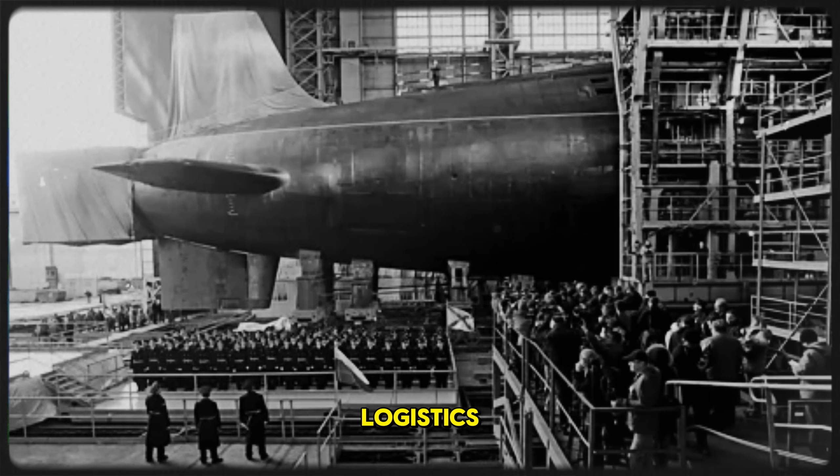The shift from the Alpha to the Akula marked the victory of pragmatism over ambition. The Soviet engineers admitted that they could not beat the laws of thermodynamics or logistics. They accepted that a submarine that works 90% of the time is infinitely superior to a submarine that works 100% of the time, but only for a week. The Alpha had been a Ferrari. The Akula was a tank. And in war, tanks win.

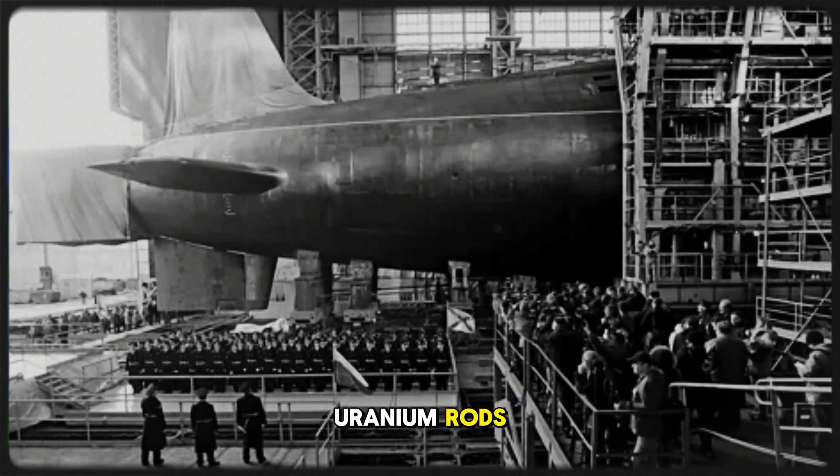However, erasing the Alpha fleet was not as simple as cutting up a steel hull. The titanium shells were valuable and relatively easy to recycle, but the hearts of the ships, the liquid metal reactors, presented a disposal nightmare that haunts the Russian Arctic to this day. A standard nuclear reactor can be defueled by removing the uranium rods, but an Alpha reactor was different. The coolant was a solid block of lead and bismuth laced with highly radioactive polonium-210. You could not simply drain it.

To defuel an Alpha, the engineers had to use external heating units to melt the coolant, carefully extract the fuel assemblies, and then flush the system. It was a dangerous, radiologically hot process. The infrastructure at Gremikha, already crumbling, was not up to the task. In the chaos of the 1990s, the funding for proper disposal evaporated.

So the Russians improvised. They removed the reactor compartments entire. They sliced the submarines into sections, isolating the central cylinder that contained the lead-bismuth core. These massive cylindrical units, filled with solidified liquid metal and residual radiation, were sealed with concrete and bitumen. They were dragged to long-term storage facilities in Sayda Bay. Today, if you look at satellite imagery of the Kola Peninsula, you can see them. They look like giant, rusted cans lined up in rows on a concrete pad. They are the preserved hearts of the Alphas, cooling slowly in the Arctic air, waiting for a final geological repository that has not yet been built. They are monuments to a technology that was too dangerous to use and too dangerous to throw away.

Only one vessel escaped total destruction, though not in a way that preserved its glory. K-373 was used for a time as a training stand, but eventually, parts of the lead ship K-64 and others were dissected for study. The surviving pieces of the Alpha program are not ships that sail, but museum exhibits and instructional cutaways. In St. Petersburg and Severodvinsk, fragments of the control panels and sections of the titanium hull are displayed.

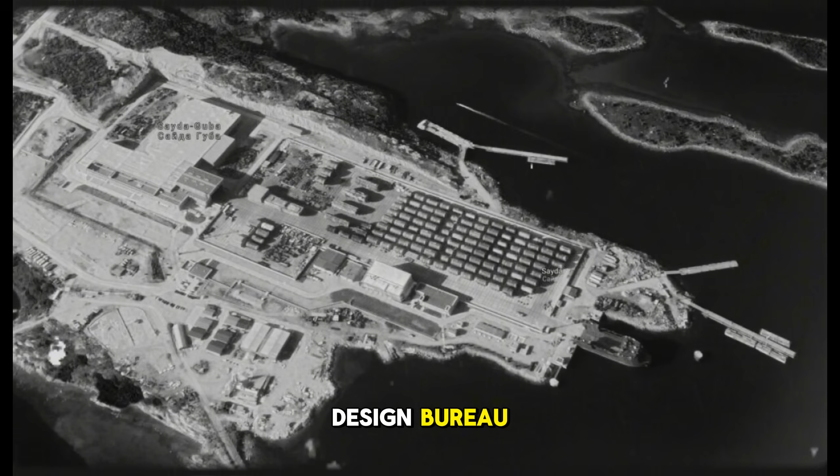Visitors can touch the metal that cost more than gold. They can look at the fighter jet yokes that steered the submarine. Plaques celebrate the genius of the Malachite Design Bureau and the bravery of the crews. But the plaques do not mention the polonium leaks, the freezing reactors, or the steam lines that burst in the winter. They do not mention that the fleet spent most of its life tied to a pier because the Soviet Union could not afford to run it.

The history of the Alpha is often filtered through a lens of nostalgia for Soviet power. It is remembered as a triumph of science, and in a pure engineering sense, it was. Achieving 45 knots underwater is a feat no other nation has matched. The automation was decades ahead of its time. Modern Western submarines like the Astute and Virginia classes now use fly-by-wire systems and reduced crews that echo concepts pioneered on the Alpha.

But as a weapon of war, the Alpha was a failure. It failed the most basic test of military engineering: sustainability. A weapon that destroys its own infrastructure is not an asset, it is a liability. The lesson of the Alpha class is a cautionary tale for any nation seduced by the promise of the Wunderwaffe, the wonder weapon. The Soviet Union believed that a single technological breakthrough could negate the strategic advantages of the West.

They believed that speed could defeat numbers and that titanium could defeat economics. They were wrong. The Cold War was not decided by who had the fastest submarine. It was decided by who had the most robust economy, the most reliable logistics, and the most sustainable doctrine. The United States Navy won the underwater war not because they built better Ferraris, but because they built better Toyotas: reliable, effective, and mass-producible. The Los Angeles-class submarines that hunted the Alphas are still in service today, upgraded and effective. The Alphas are scrap metal. The endurance of steel proves superior to the brilliance of titanium.